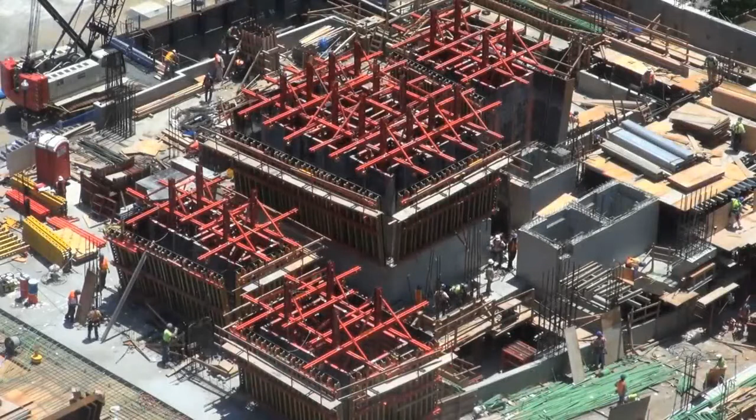Steel is the most important material to human society. It has been the skeleton of human industry for centuries, and the advent of methods to mass produce it from iron ore was the impetus to transform human society from a mostly agricultural lifestyle to urban industrialization. It forms the backbone of our skyscrapers, it paves the way for our railways, it shapes the engines that power our society, and the very tools that forge these objects are made from steel.

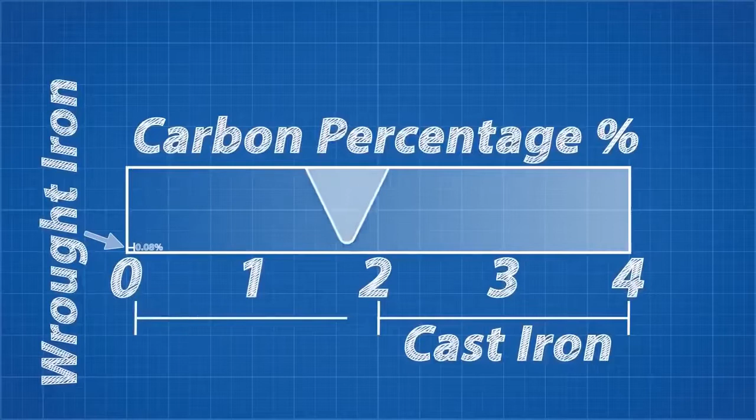We have spoken before about how the refining process of iron determines whether the resulting material will be iron or steel, and how the exact percentage of carbon present in the material has dramatic results on the final material properties, and how production methods through time have taken steel from an expensive material reserved for swords, armour and toolmaking to one that has permeated into nearly every technology we use in our lives.

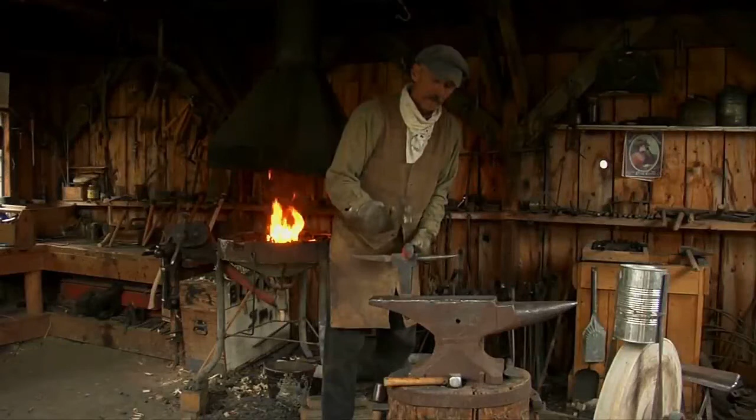But I failed to tell you why that simple addition of carbon has such a huge effect on the iron, turning it from a relatively weak material to one capable of launching an industrial revolution, which is what we're going to learn today. Much of our knowledge in crafting steel was passed down over the centuries from blacksmith to blacksmith, creating tools for their communities.

So to learn more about this amazing material and how blacksmiths carefully tailor its material properties, I visited Alec Steele's workshop to create my own knife from scratch.

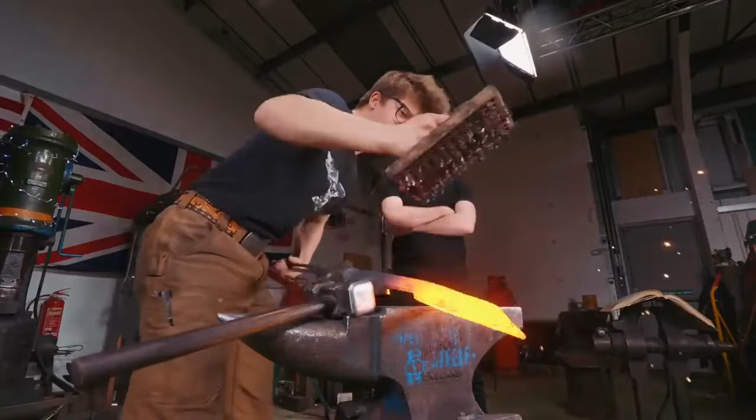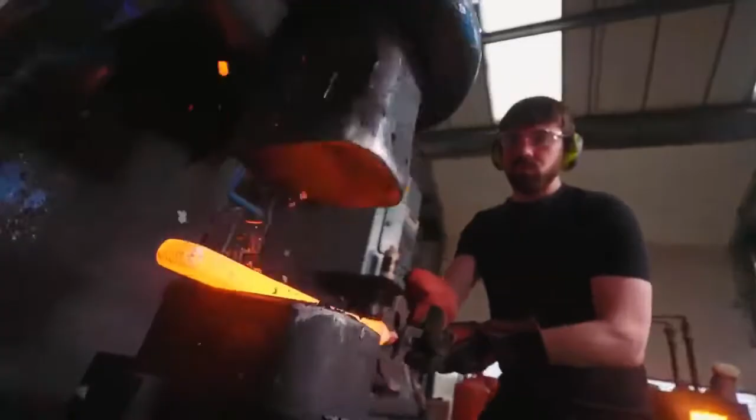We started our forging process with round stock 1055 steel with 0.55% carbon content, and placed it in the forge and gradually shaped it with a power hammer to a rectangular bar that could be more precisely shaped into the shape of our blade using a 3-pound hammer that my wee arms struggled to swing after an hour.

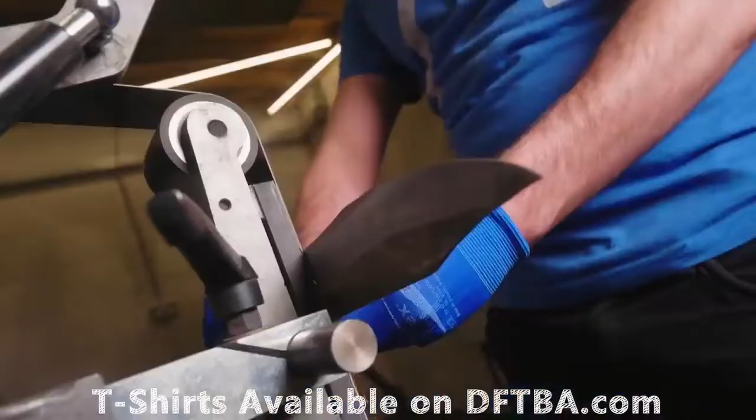Once we roughed out the shape, we began to grind and refine our blade, eventually producing our blade blank that would be later grinded to its final shape, but before that could happen we needed to perform some metallurgy wizardry through the heat treatment process.

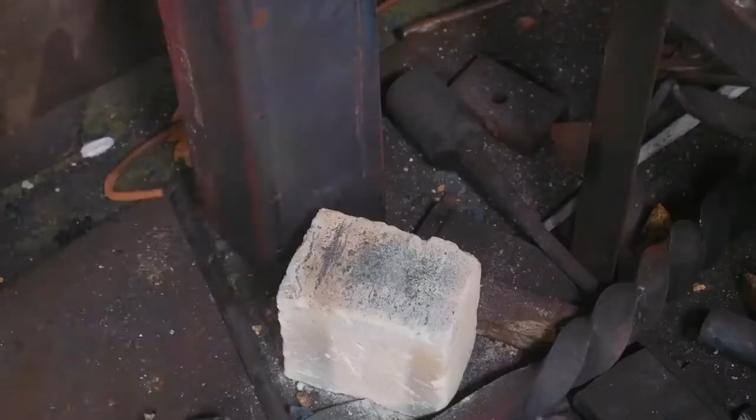To drive home how important this step is, we tested 4 samples of the same material at different stages of the heat treatment process. This was our sample before the heat treatment process, which you will quickly see was the weakest of the bunch. This is the normalized sample, which was ductile with a low yield stress. It took several hammer blows, which it absorbed through plastic deformation, not ideal characteristics for a sword or knife.

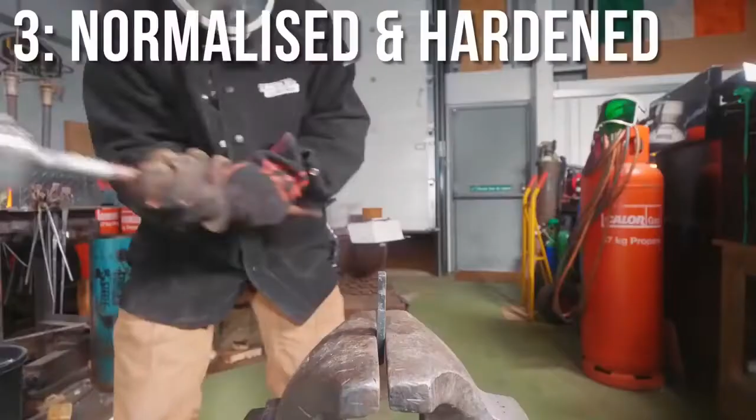Finally we tested the tempered material, which absorbed every hammer blow with minimal plastic deformation and only broke when we cut a notch into the material to create a stress concentration point. This material is tough, capable of absorbing energy without deforming permanently, and hard, allowing it to resist damage to the cutting edge. It is the ideal material for a blade.

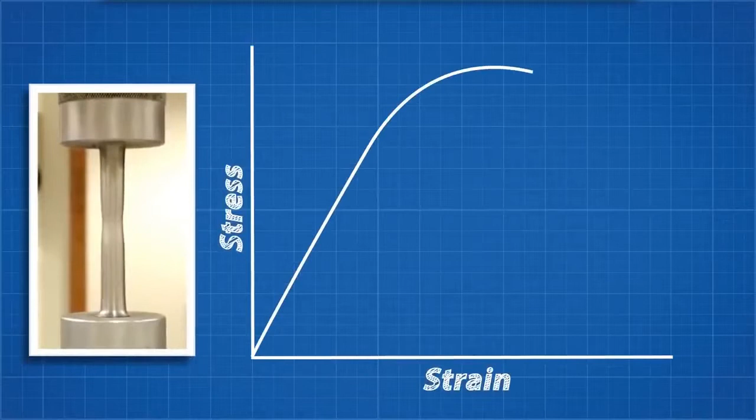If any of these terms confused you, I created a video called Material Properties 101 that you can check out to get a better understanding of material property terminology.

So how can the same steel alloy change so radically by simply applying heat? Well, this is the magic of the iron-carbon alloy. We can carefully control how the internal metallic crystal structure forms with heating and cooling cycles.

First, let's see how adding carbon to the iron affects the crystalline structure. With no carbon present, pure iron forms a crystal structure called body-centered cubic with an iron atom at each of the 8 corners and another in the center.

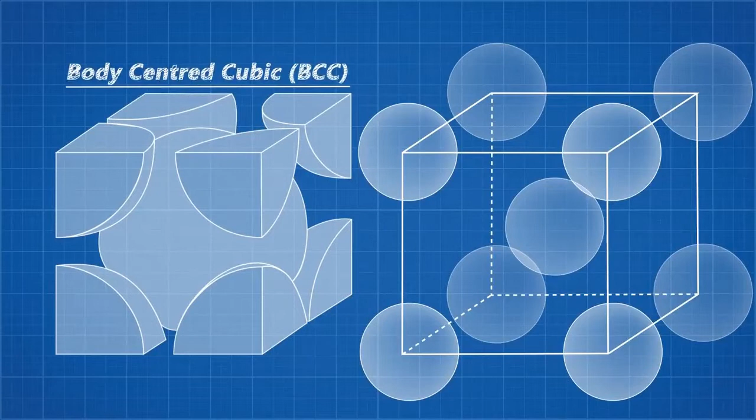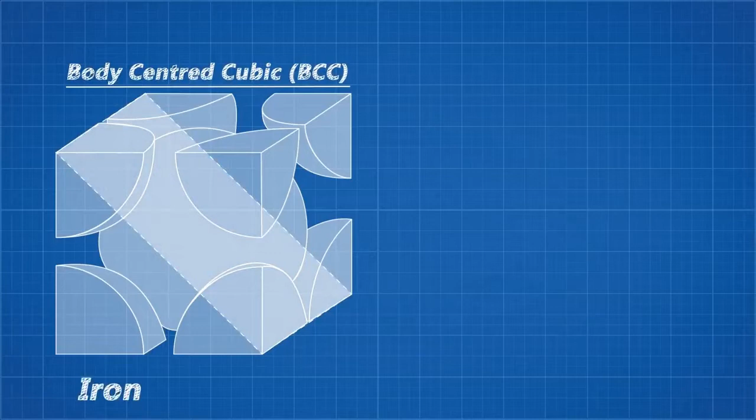Each crystal structure has a direction it most easily wants to deform, called a slip plane. For body-centered cubic, the slip plane occurs along this plane. Metals with body-centered cubic crystals like iron and tungsten tend to be harder and less malleable than metals with face-centered cubic crystals like aluminium, lead and gold.

When a metal is cooling, these crystals grow from individual nucleation points and form grains, where each grain has the same orientation of slip plane, but neighbouring grains may not have the same slip plane. Let's think about this two-dimensionally. When a force is applied, the grain wants to slip in a particular direction and passes the force onto the next grain in that direction too.

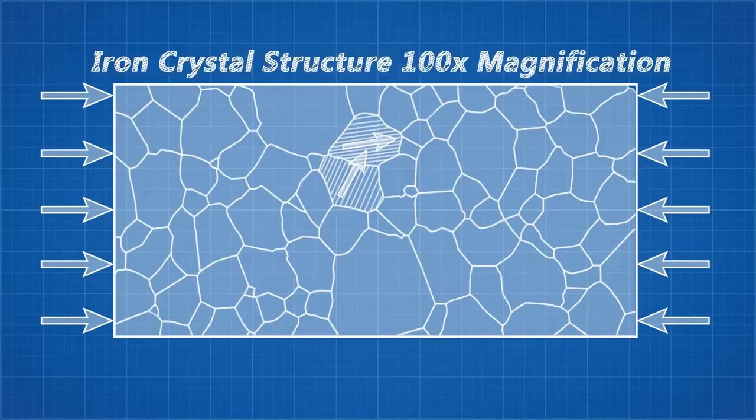But this grain's slip plane is at a different angle, so that force needs to be greater in order to cause deformation. It's like trying to push a train down a railway track by pushing on its side. It's not going to go anywhere easily. So smaller and more numerous grains results in a stronger material.

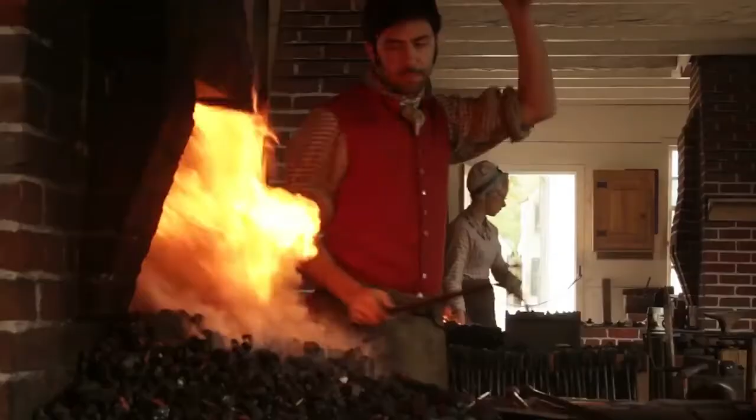Pure iron tends to always have the same crystal structure as it cools, and its crystal structure doesn't change meaningfully with heat treatment. This is where alloying with carbon comes in.

To explore this, let's look at our phase diagram for carbon steel. On this diagram, we have our carbon content percentage on the x-axis and the temperature of the metal on the y-axis. This tells us the crystalline structure of the metal at various temperatures and carbon contents.

On the left-hand side, we have pure iron, which, as we explained earlier, forms only one crystal structure called ferrite. As we move across the diagram to the right-hand side, less and less of the crystal structure forms ferrite, and more forms an iron carbide alloy, commonly called cementite.

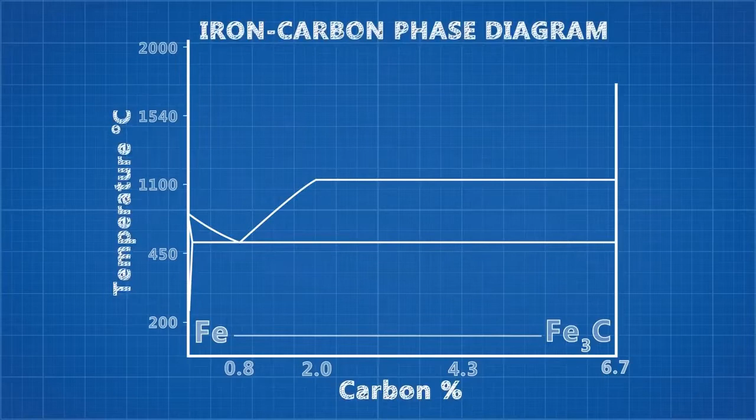Now, if we move up in temperature, we start to see these lines that represent transitional temperatures, where the crystal structures of the steel begin to transform into a new crystal structure called austenite. Moving further up again, we see these lines representing the transition of the material to a liquid state.

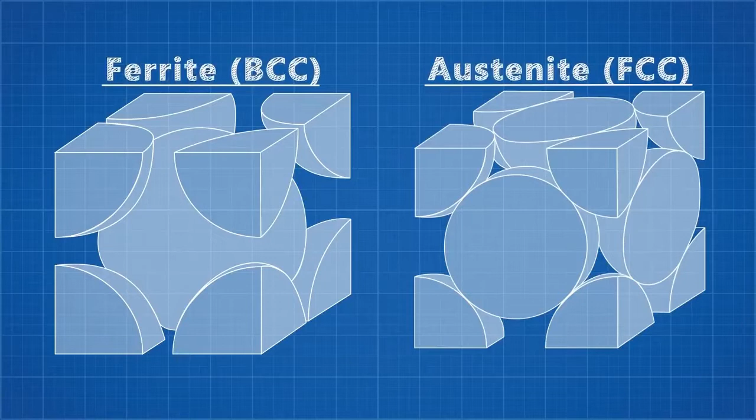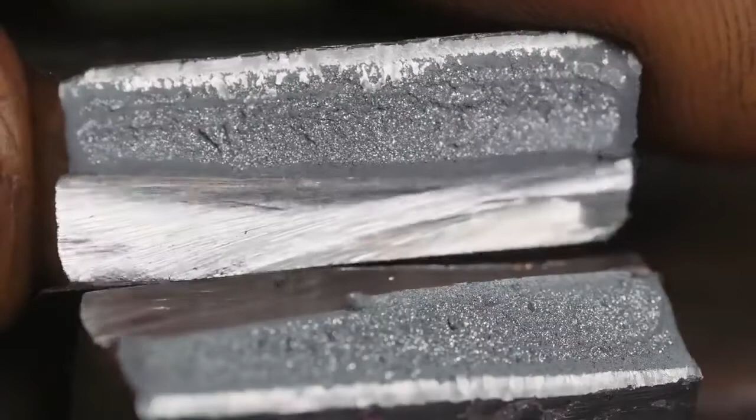Austenite's primary difference to ferrite is that it forms a face-centered cubic crystal structure, while ferrite is body-centered cubic. This packing pattern is denser than body-centered cubic, but it opens up spaces in the crystal structure that interstitial carbon atoms, which are smaller than iron, can snugly fit into, allowing austenite to have a higher solubility to carbon over ferrite.

Using all this information, let's take our 1055 steel with 0.55% carbon content and see how it transforms from the start of our heat treatment cycle to the end. The first step is called normalization.

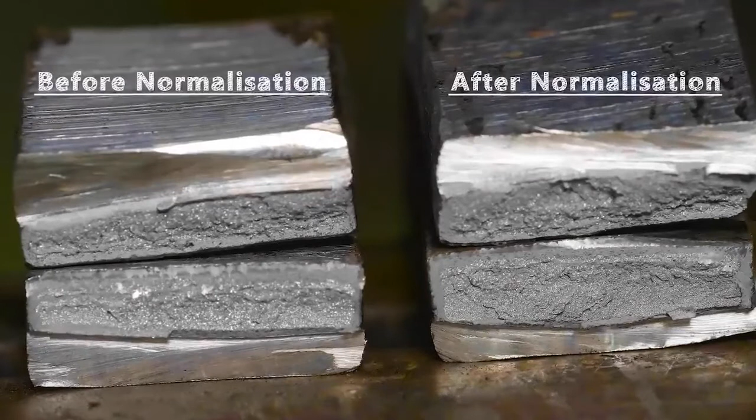Normalization's primary function is to relieve internal stresses and strains that form during the forging process and return the material to its original crystal structure before forging began. It's effectively a reset button for the steel and creates a nice even grain size and distribution, increasing its strength.

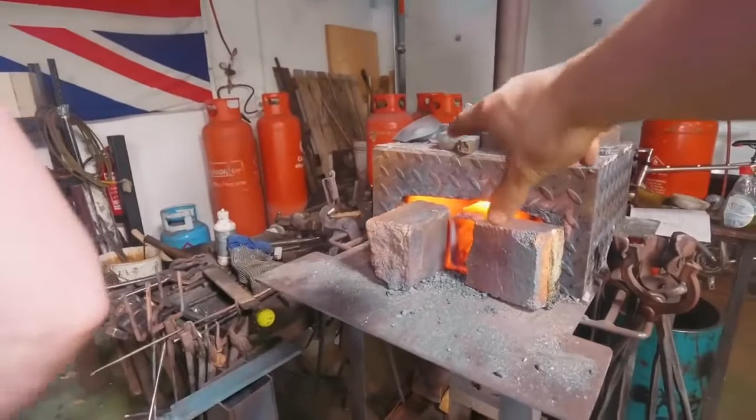Here we place the knife inside a steel tube to prevent the metal from receiving heat directly from the flame, but instead a more even radiative heat from the tube. Once it reaches this transition temperature, we let it soak to give the crystal structure time to settle. The next step in normalization is to allow the steel to slowly air cool. What happens now depends on the carbon content.

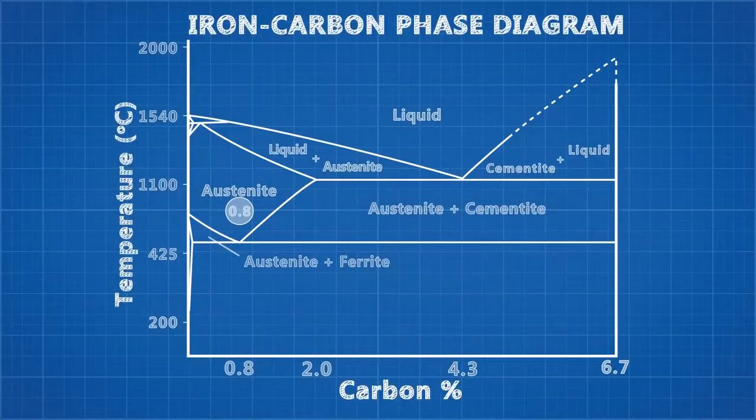If we take a 0.8% carbon steel and cool it through the transitional temperature, the austenite and the interstitial carbon will slowly transform to a mixture of ferrite and cementite, which takes this laminar structure called pearlite. Pearlite only forms at a 0.8% carbon solution.

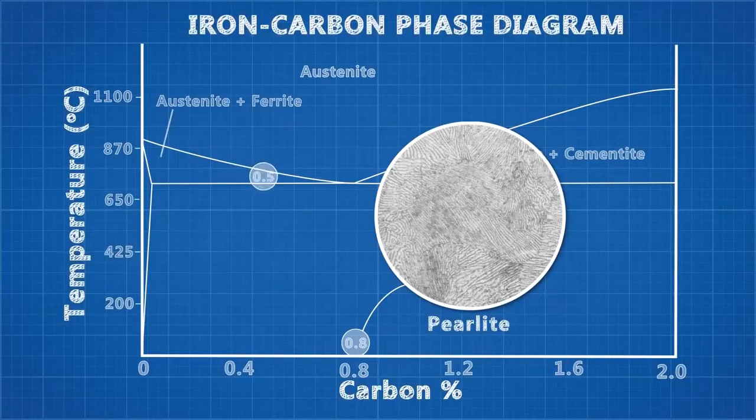Now if we take a 0.2% steel and slowly cool it to its first transitional temperature, where ferrite first begins to form - ferrite is pure iron, so as it forms, the carbon percentage begins to rise. This will continue until the remaining austenite has a carbon percentage of 0.8% and will then form pearlite from this point on. This forms a crystal structure dominated by ferrite, shown here as a lighter colour, surrounded by the darker pearlite.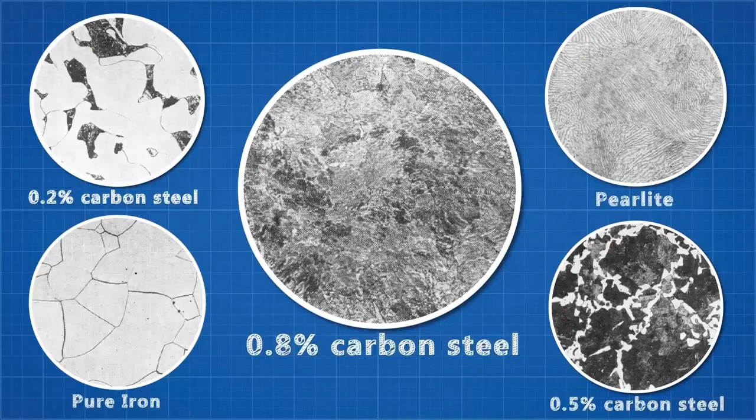How pearlite strengthens steel is not well understood. It has little effect on the steel's stiffness, but increasing the pearlite content has a dramatic effect on the material's yield point, making it much more capable of absorbing energy without permanently deforming.

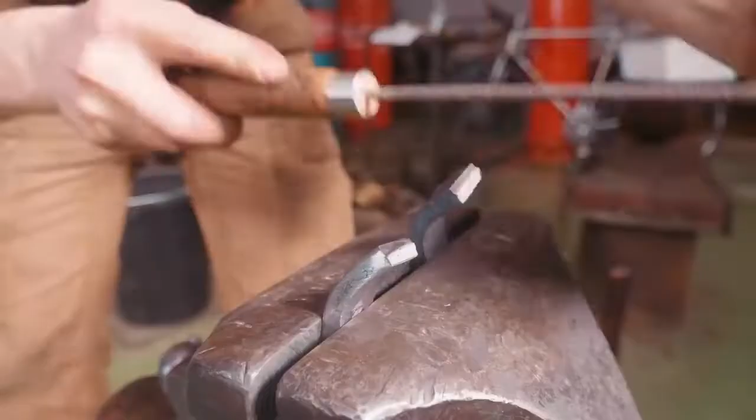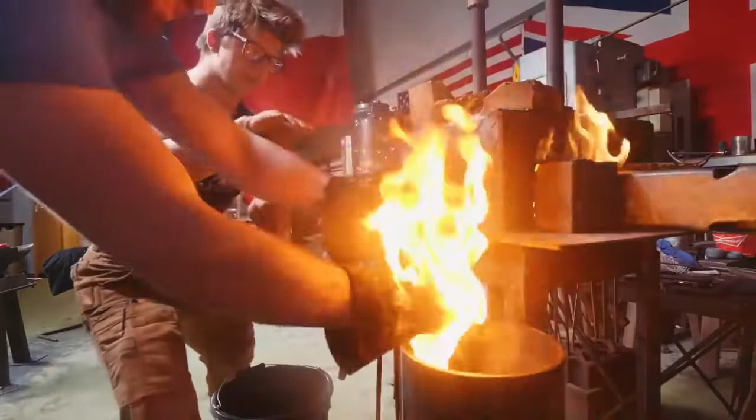But we can increase the material's stiffness and hardness with our next step. If we heat the metal back up to form austenite once again, but this time instead of letting it cool slowly, we rapidly cool it in oil while casually burning your arm hair off and barely flinching, the carbon atoms that spread out throughout the hot austenite structure cannot diffuse out of the crystal lattice to form cementite, and instead get stuck in solution, creating a new crystal structure called martensite.

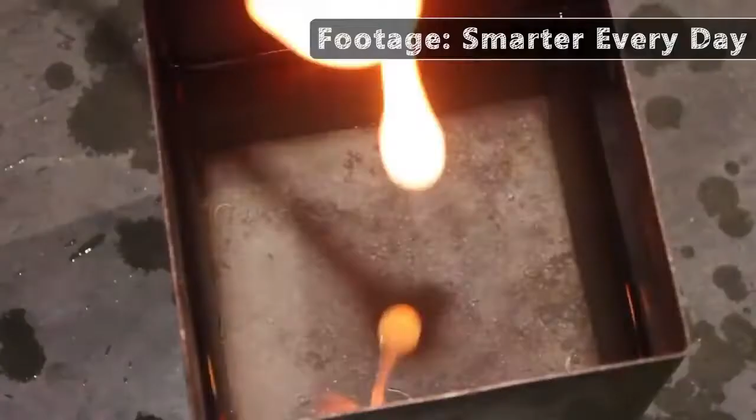This crystal structure has a huge amount of internal stretching, in part because the carbon trapped within the crystal structure causes the crystal lattice to deform, but also because during the rapid cooling, the surface cooled much faster than the internal material. This causes internal tension in the material.

These internal strains make it harder for additional deformation to occur, but this does not make the material stronger. It simply means that it will not stretch and bend before breaking. And when it finally does fracture, all of this internal tension is suddenly released in an explosive expansion.

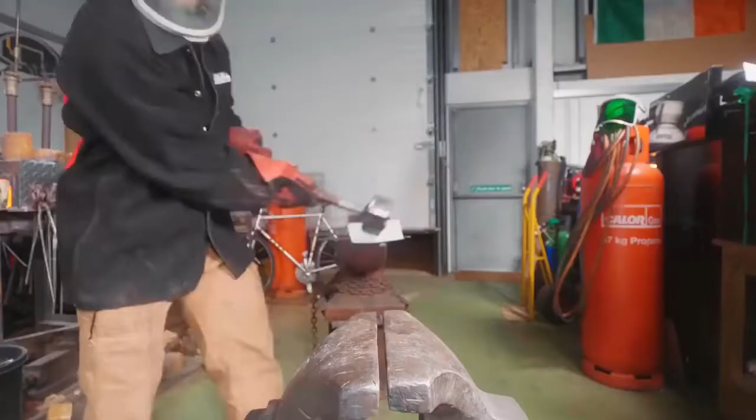If you've watched Smarter Every Day's video on the Prince Rupert's drop, you'll have seen this principle demonstrated in incredible slow motion.

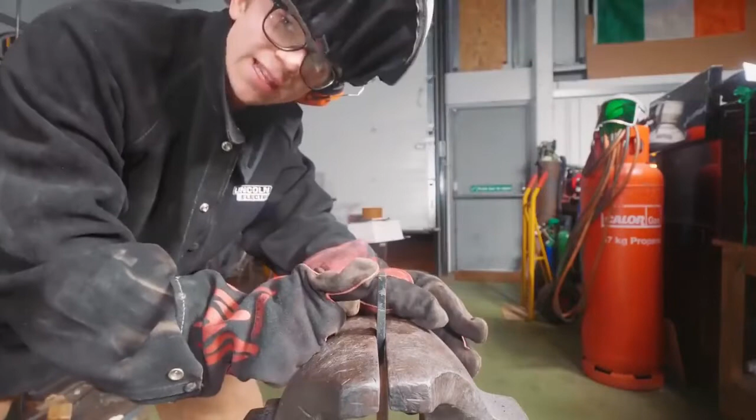This material property is called hardness, and we want our cutting edge to be hard to resist damage when cutting. But we do not want our entire blade to be hard, as it will not be able to absorb a lot of energy. It needs to be able to dissipate some of that energy through heat and deformation.

This is where the final step of the process comes in, called tempering. Tempering raises the temperature enough to allow the carbon trapped in solution to escape. We just use an oven set at 200 degrees. The carbon then coalesces to form cementite once again, but instead of forming pearlite like before, it gathers in globules surrounded by ferrite. Tempering also relieves some of that internal tension caused by the rapid cooling.

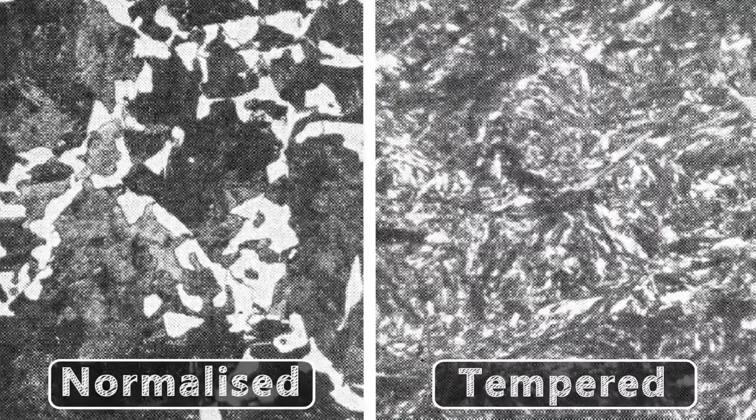This reduces the hardness but increases toughness. This produces a material that has the perfect balance of characteristics between the normalized material and the hardened material. It is ductile enough to absorb hammer blows without shattering, but strong enough to not permanently deform, and with enough hardness to ensure it doesn't gather damage on the cutting edge.

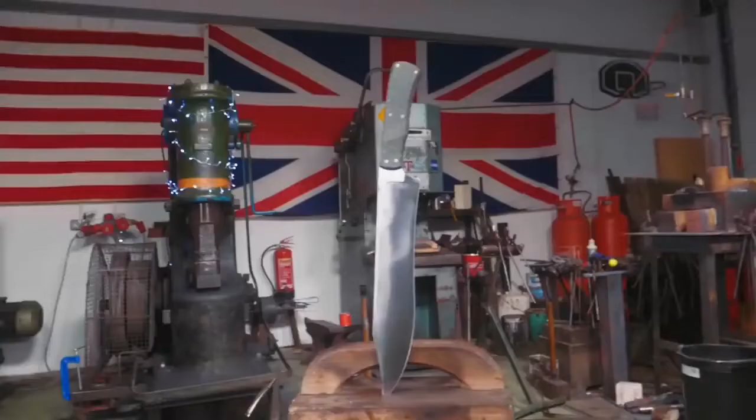This process gave our steel the perfect material properties, and a lot of that is thanks to the quality of the steel we started off with.